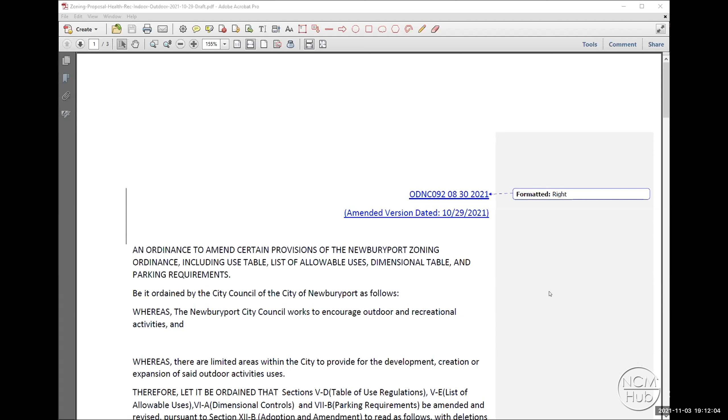When you met in committee last time, there were a couple of changes requested, so we've noted the date of the change here. There were adjustments made to the use table, specifically taking out the SP, or special permitted, category in a couple of districts and making that NP, or not permitted, to make clear it would not be allowed in those districts for the changed use and definition from country clubs to outdoor health and recreation facility. So the outdoor health and recreation facility, the newly termed category, would not be allowed in the R1 or a business district or industrial business districts.

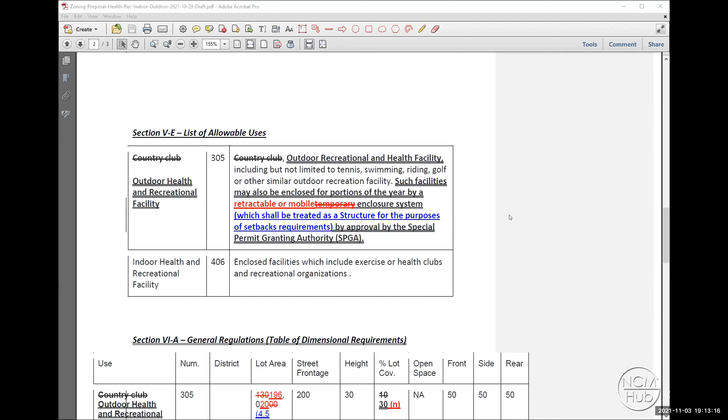The next change is on the definition of outdoor health and recreation facility. There was language in there before about the enclosed portions of the building or partitions that could be retractable. We tried to better clarify that with additional language. We added specific language about the retractable or mobile enclosure system, and we included clarity to make sure there's no dispute whatsoever that the retractable structure itself would still be considered a structure for the purpose of setbacks.

We increased the lot size requirement. That was to address a concern that we not allow this use any more locations than necessary, recognizing the size of the site—one in particular where there was interest discussed at the last meeting—because that site meets a larger size requirement.

There was discussion of raising that number, and what we came to was 4.5 acres as the requirement. Then for the lot coverage, there was a concern noted by the original proponents of this amendment to have some flexibility in light of the enclosed structure being temporary. So there's additional language added in a footnote that the planning board, at its discretion, owing to the use of the temporary enclosure system, may waive that requirement and permit larger lot coverage as part of the special permit. That's similar to the ZBA granting a variance, but it does not require the hardship component—it's just demonstration that it's not detrimental to granting the special permit. There are other provisions like that in the ordinance, and this allows the planning board some latitude to further increase that percentage.

The other concern reflected in the changes is specific parking requirements. Both the facility operators, their attorney, and the zoning administrator weighed in on these parking requirements, and I know Councilor McCauley also weighed in on the particulars. So in essence, these changes were made to address the concerns raised at the last meeting, with the hopes that if they're adequate, this item could move forward. But again, we defer back to the chairs and to Councilor McCauley.

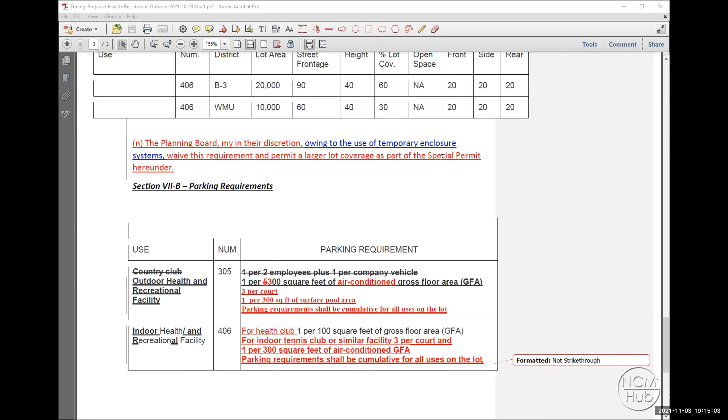Are there any comments from the planning board members on this revision? Does it capture everything that we had talked about as far as you're concerned?

Can I ask a question? When was this discussed before? I'm not sure I was at the meeting. What did we say, October 6th maybe? Yeah, right, October 6th.

Okay, this may have already been discussed, but why would we not allow an outdoor health facility in the industrial park?

There's been a fair amount of discussion of what uses to allow in the business park. There has been some sensitivity. I'll defer to others who may want to weigh in, but there has been some concern from business park operators about having more traffic-generating uses there—more day-to-day in-and-out traffic as opposed to their deliveries and things like that. So that seems to have been a point of concern or conflict. There is obviously a change of uses on Graf Road that have taken place over time that's migrated that area a little bit.

There was some concern from the business park over the years about migrating too many of those types of uses. The outdoor health and recreation facility could have lots of visitors coming and going, pedestrians and so forth, causing concern about the type of traffic coming through their streets and complaints about adjacent businesses that have been in operation for a while. But others may have thoughts on that side of it from our last discussion.

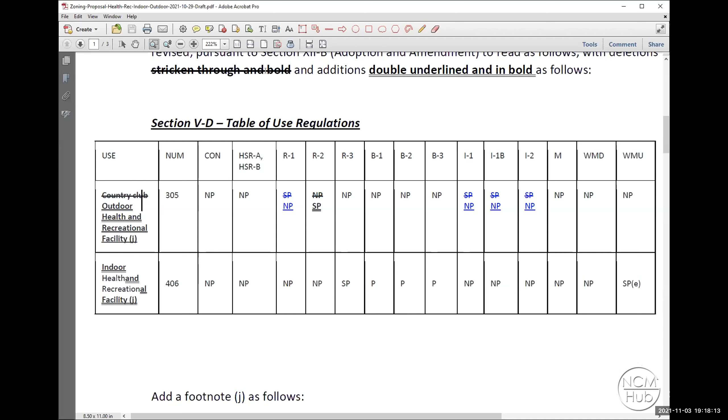I'm not as concerned about R1. I don't have any R1 in Ward 2, but Councilor McCauley does in his ward. I think the concept was they were thinking of golf courses back in the day. The R1 is the palest yellow on the map. I really defer to the ward councilors out there - that's wards 5 and 6 and a little bit of 4 - on whether it's appropriate. But I think what we concluded is that it doesn't fit with the suburban style housing they have.

I was more focused on R2, which is the majority of our residential area, and I can speak to that. But I'm afraid I'm letting you down - I don't remember where we ended up on R1.

Councilor McCauley, could you weigh in on this particular issue? Sure, I have a lot of R1 in my territory. We looked at a different map and parcels - there just weren't any available parcels to be able to do that. So as we talked it through, sure, somebody could buy 5 or 6 or 10 or 24 homes, but that's not really an appropriate use of the land. I'm thinking more of a small tennis club or something on a smaller scale, other than golf courses which I understand are huge. But when we increase the lot size coverage, we remove just about all of the potential in R1, so it was like one of those hanging chads that we just took off.

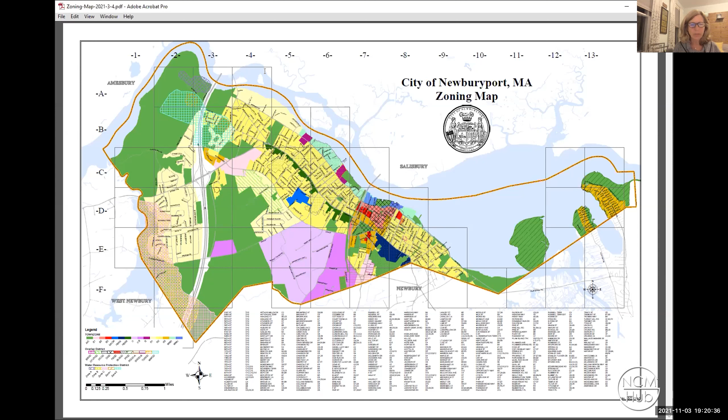And so this doesn't pertain to any kind of public park, like that little park off of Washington Street with pickleball courts - that's a public park. So is this only for private? Correct, yeah, I think we have a different use category for that under institutional, right Andy? Correct, yep.

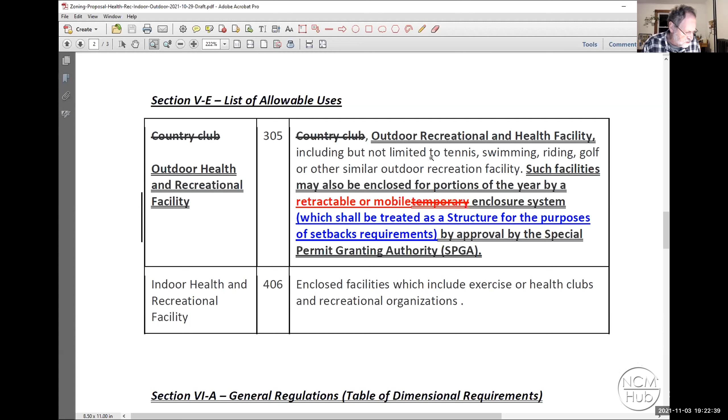I raised this concern at our last discussion about not having an open space requirement. The R2 district has a 20% maximum lot coverage and a 40% minimum open space requirement. So we've given more flexibility by increasing it from 10% to 30% lot coverage. But I'm somewhat concerned about the lack of an open space requirement. An open pool or a tennis court or a patio is part of open space, but once it gets covered by a temporary roof and becomes a building, as we just discussed, it's no longer open space. So it can't be in the yards.

So it would be subject to the front, side and rear yard setbacks of 50 feet. But I guess I would just want to raise this concern again. If we're having a neighborhood, and granted, we're talking about a specific parcel, but for the point of view of zoning, we should be thinking about the general zoning standards. So I guess I wonder why we don't have any open space requirement. And kind of related to that, I'm concerned about that footnote. It seems like it's giving us an awful lot of discretion, which we don't give to other lot coverage, other buildings.

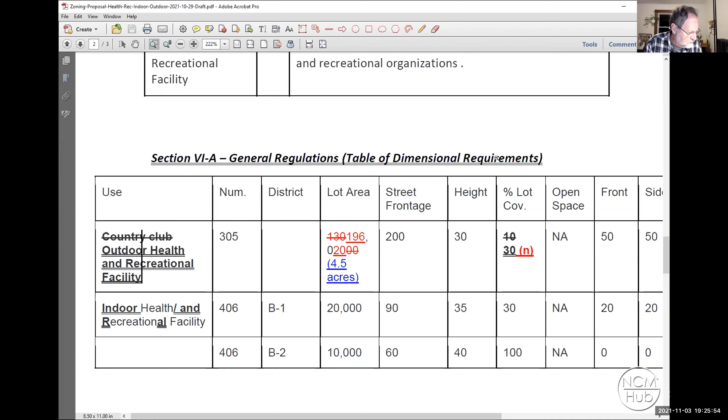Councilor Ackerman? Yeah, first, I think on the previous table, you just changed the word structure to building and you're all set, because a building is a subset of a structure. So because it has a roof, I think you do that and you're all done. It's just change structure to building.

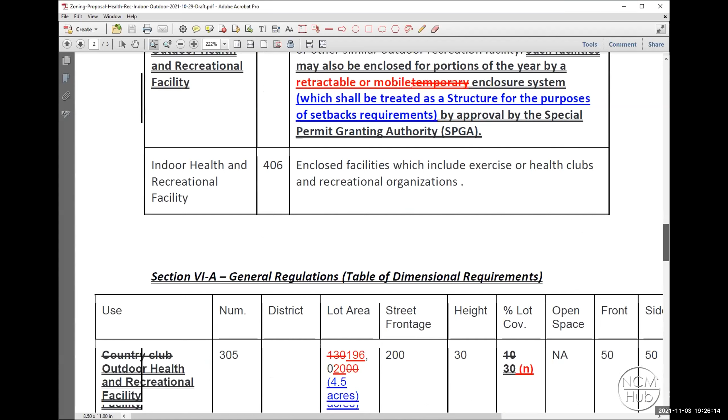On this one, if you look at the definition of open space under our code, it's really - I don't know where they copied it from, but some suburb. So they really had in mind residential zones, and it says open space shall be used for landscape areas and for active and passive recreation, including but not limited to tennis courts. So it's kind of circular here because this is a tennis club.

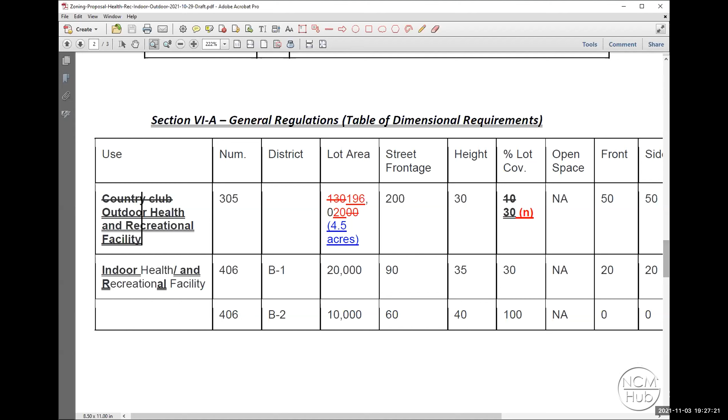And then footnote N, I hear what Rick's saying, which is that it's a little vague, the kind of discretion, because it says waive, and waive is not reduce. Waive is like zero out. I don't think that's what you meant, I think you meant reduce. But anyway, I think if we focus on the lot coverage, we're there. I wouldn't worry about the open space.

To Councillor Eigenman's comment, I think you're correct, and I think what would make sense is exactly what you suggested: for the waive this requirement, it actually should be waive or reduce this requirement. Or if you prefer reduce, just to be clear that is the intent. I think that's actually more consistent with the language we have in the 40R district.

And to clarify, Andy, while you're speaking, where did the 30% lot coverage come from, that number? Was there any analysis, or was it finger in the air? I believe Attorney Mead may be able to speak to this, as she did on behalf of her client at the last hearing. I think that's largely where that number had come from, essentially trying to figure out what would be a maximum that is realistic or feasible in light of what was being discussed there. But again, I think that's probably a question that should be conveyed.

Well, if we discussed it last time and came up with 30, I think we can leave it unless you wanted a further explanation. And Rick has his hand up, so I was going to ask him, do you want that further discussed?

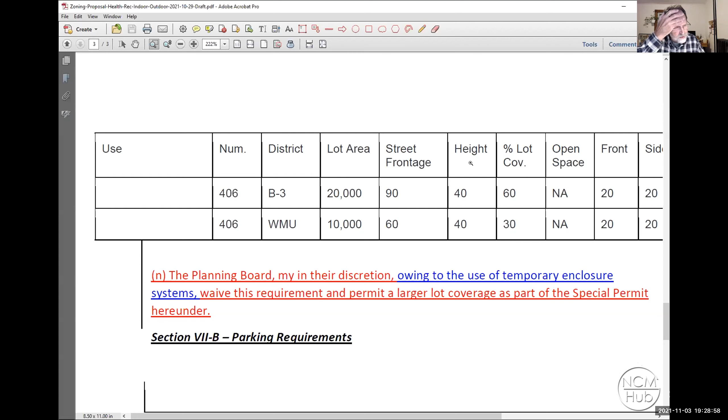Well, I just wanted to point out that Councillor Eigenman had said he didn't know what that penciled out to. 30% of the minimum lot area is 1.35 acres of building coverage. So it's a pretty substantial amount. I'm not sure that there's any scenario in which we would want more coverage than that. And therefore, why would we want that footnote, given the fact that we need to have 50 feet of open space all around the perimeter plus parking for the site? So I'm not sure that you can get more than 1.35 acres of building onto that minimum lot area.

I see Attorney Mead's hand is up. Andy?

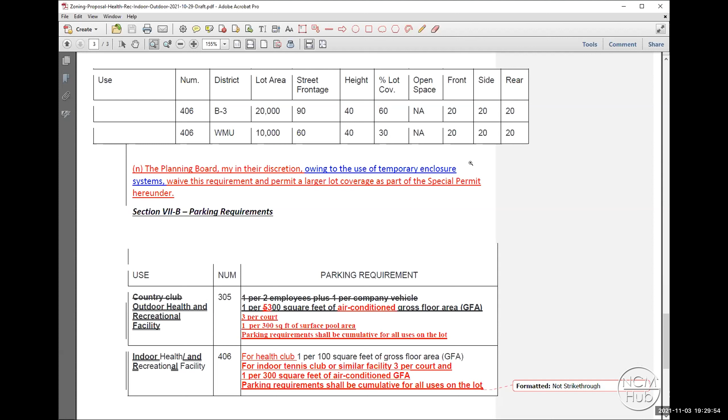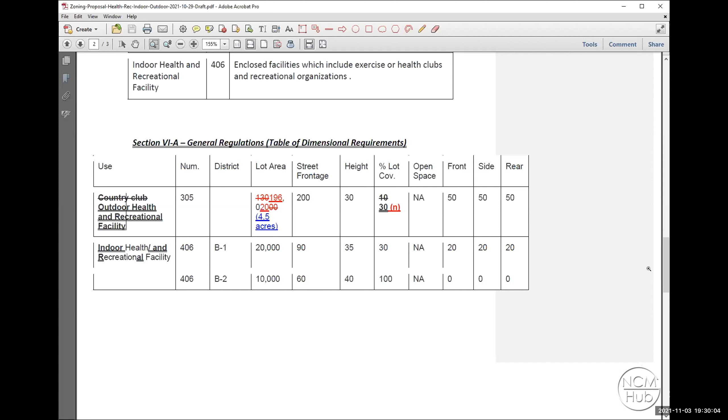Thank you, Madam Chairs, plural. May I just offer a few pieces of information related to the lot coverage so that you know it wasn't a finger in the air? Thank you. So if I could, Andy, if you could switch over to our presentation, because we did the numbers so you could actually see, because I knew this was going to be a question that Mr. Tainer had at the last meeting. So Andy, if you could, go to that slide.

So what happens is my clients, who haven't done a full analysis of the lot, said okay, about what size of pool are we going to have? And then you have to think about potentially what the additional coverage would be around that pool if you put a structure on it, because the structure wouldn't be immediately on top of the pool. And then you have locker rooms and perhaps some amenity building that might have a snack bar in it, or even an open roof - a roof with open area, which now, under the new definition, is a building and considered against lot coverage even if it has no sides.

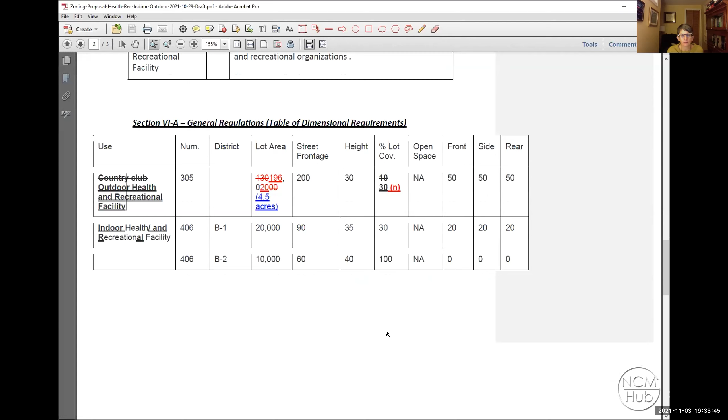Any reason not to move on, anybody? Alden does have his hand up. Sorry, Alden, are you still on the 30% lot coverage?

Well, I was on the 6A table in general. I was just wondering if on Use 305, where the district is blank, should that really say R2 there, as that's the only one allowed with special permit in the revised version? Should we specify that in the district column?

This is Andy. Jennifer can speak to that as well, but there isn't a need here because functionally that still operates the same way, but certainly we could do that here. If it changes again, there might be an issue. Usually when there's one requirement for dimensions regardless of district, we do not list any district there, but as you pointed out, we could just put that in this box now.

Okay, and then similarly for the 406, should there be a row for the R3 district, since that's allowed by special permit and that's not listed in the existing table? Yeah, I see what you're saying. Thank you.

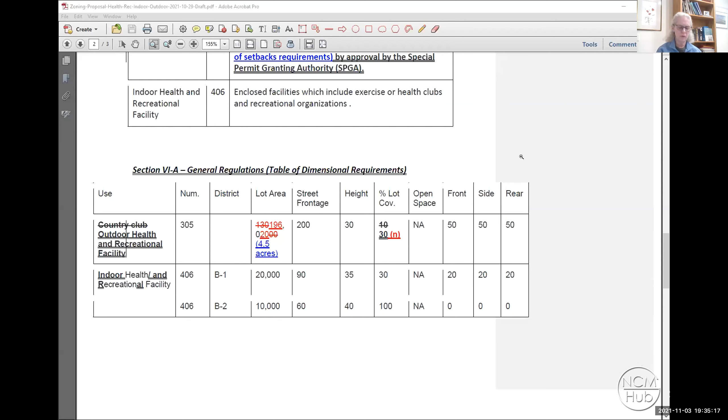Okay, thank you. Moving on, Rick, with your next comment please. This has to do with the parking requirements, and it's just trying to understand what these mean. I'm not sure what the restriction about air-conditioned gross floor area is, as opposed to just gross floor area. If it were heated but not air-conditioned, would this not apply? I guess that's the first question.

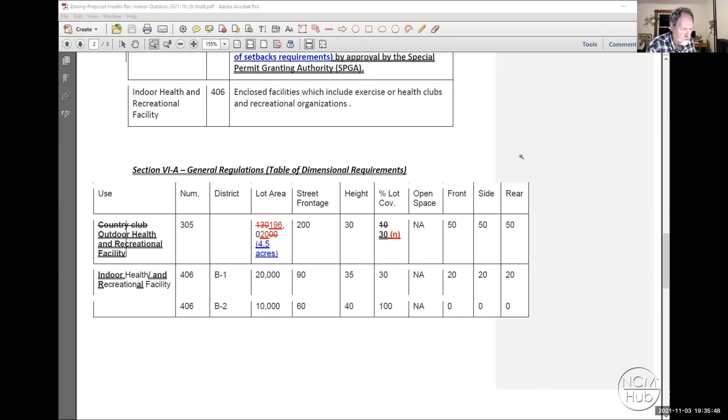This is under the parking requirement for both the outdoor and the indoor pieces. So I don't see what the word air conditioned adds, since gross floor area is the area within the building. The second thing is 3 per court, and I assume this means tennis and pickleball, but it could mean basketball too, since court by itself is not defined. And then I didn't know what surface pool area meant, as opposed to pool area. There seem to be extra words in here, and that raises questions for me.

Jennifer has her hand up. I wanted to speak to two of the points. Specifically, air conditioned speaks generally to heating, cooling, and ventilating, as opposed to those specific terms. I believe the reason to differentiate here is we have lot coverage, which would include, as Attorney Mead pointed out earlier, area of the site covered by a roof and columns but not necessarily within a building. So it's not air conditioning in the layman's terms, but in industry terminology. And I believe surface pool area was meant to differentiate it from the pool deck, though Attorney Mead can correct me if I'm wrong.

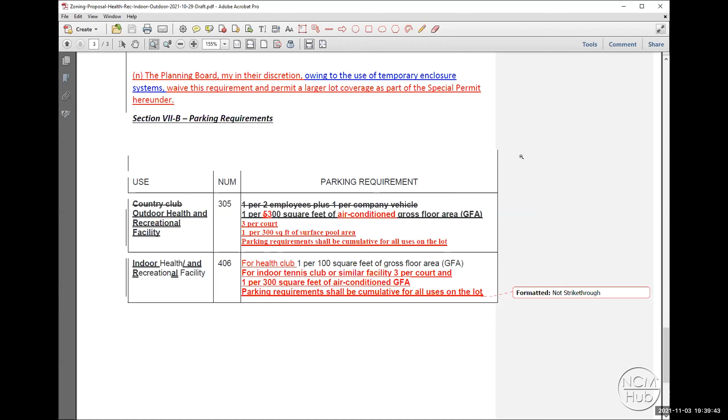Just to give you an idea of the impact, Andy, if you don't mind going back to my presentation for a second. So currently, the club has 82 parking spaces, and that appears to be based upon gross floor area of the entire club.

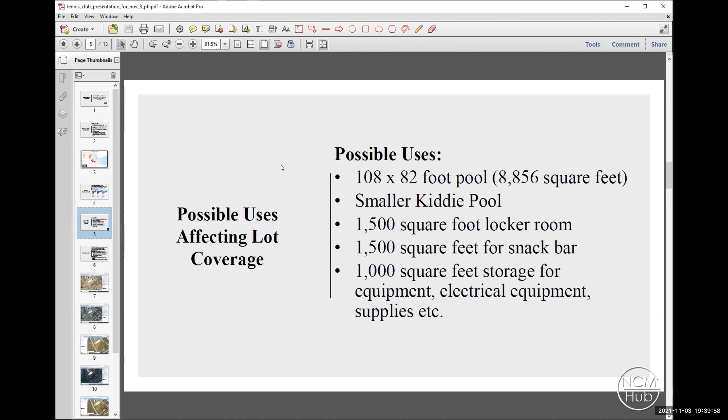If you go to slide 7, Andy. I want to go through these images so you can see how much of this parking is actually used. This is 2001. Next, 2005. Next, 2014. Next, 2015. Next, 2017. Next, 2019. And just so we can all cry, I'll show you 2020—nobody was at the club in 2020.

My point is that they don't use the parking lot to the extent you would in a typical other building. So the standards I found across the country—from the United Land Development Code, the IBC standard, other zoning ordinances in Massachusetts and elsewhere—base it on courts.

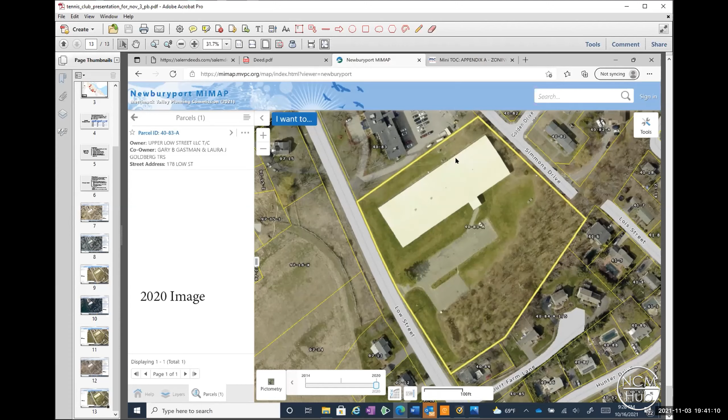Because if you think about it, take the tennis court for example: at most they have 6 people per court if running a clinic, plus the professional, so that's 7 people on a court. They have 6 courts—that's 42 people. Most of those people come together in a car, or a family comes in one car. Similarly, for a pool, people typically aren't driving individually—families come to pools together. So the standards aren't essentially by each person, but by the size of the pool, because the size of the pool limits the number of people who can actually attend. That's where those numbers came from.

Thank you. Thank you.

I think the one thing Rick was also talking about was the definition of the court. It's pretty clear it's a tennis court, right? Yeah, I mean, you can say tennis or pickleball—that's fine, because they may have some pickleball courts, but that's the point. I don't think we're talking about basketball courts, but we can say that. I'm happy to clarify that any way the board or committee would like. That would take care of it, but just those two uses.

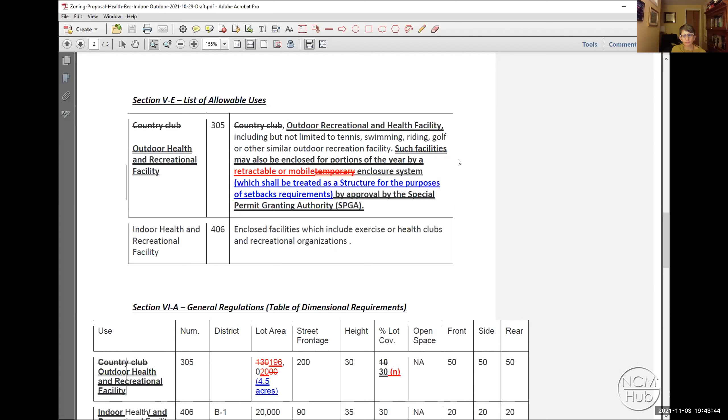Councilor Eigerman: Yeah, I'm grateful the applicant's done some research, though I wish we had seen some of the other examples. There are two ways you can go here. You can go into detail accounting for the reality of how many people use a court for a certain sport, because the number of people using a court for basketball is going to be more than for tennis inherently. So if you're going to go that way, you better plan for basketball because it's more people.

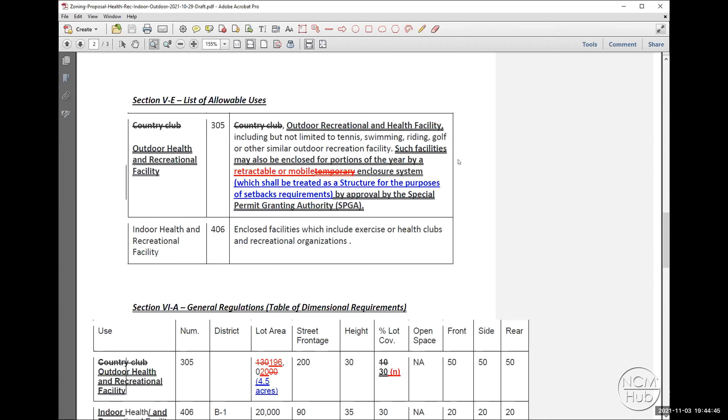I would suggest we not throw out the idea of just doing a basic square footage. I know there are fitness centers and recreational zoning, and I'm sure there are a million different ways people have skinned the cat, where they just use a big number and say this many spaces per gross square foot, then average it. It's also easier for Jennifer to enforce and apply rather than getting detailed drawings about how much is pool deck versus water, what's heated versus air conditioned. For simplicity's sake, if we could agree on just a gross number, I think it might be easier. It's up to you guys what you want to do.

You have to write this to deal with the possibility that sports are going to change over time. So I don't think an indoor tennis club or similar facility is descriptive enough. If you have basketball tournaments, that's a lot more people than tennis. That's all I'm saying.

Attorney Mead: I think Councilor Eigerman raises some good points. The uses and parking requirements are different for, say, a Gold's Gym, right? That's a different use category. As an outdoor recreational facility, the numbers are more reduced across the board of the ones I reviewed, because of the various types of activities outdoors, they really focus on the actual activity itself—tennis courts, swimming pools, things like that.

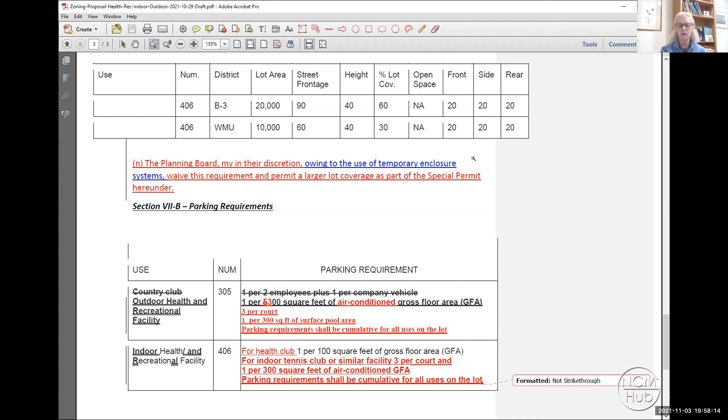We haven't had public comment on this, Councilor Shand. We probably should call for that for the record. Yep, agreed. So for anybody who is looking to make a public comment, please raise your electronic hand and we'll call on you. I see no hands. Nothing, chairs. All right, let's bring it back in then, we can close public comment.

All right, are we ready to make a recommendation to approve the revised amendment as amended tonight? Is there any further discussion by anybody? Can we hear what the changes are that are in the revised amendment?

Let me see if I can do this, and anybody stop me when I'm running on. I believe we agreed to everything in the table of use regulations, the revisions there. So moving on to section 5E, replace the word structure with building. In section 6A, I believe there was an agreement to add the 2 districts, R1 and R3 for use 305. Is that correct, Andy?

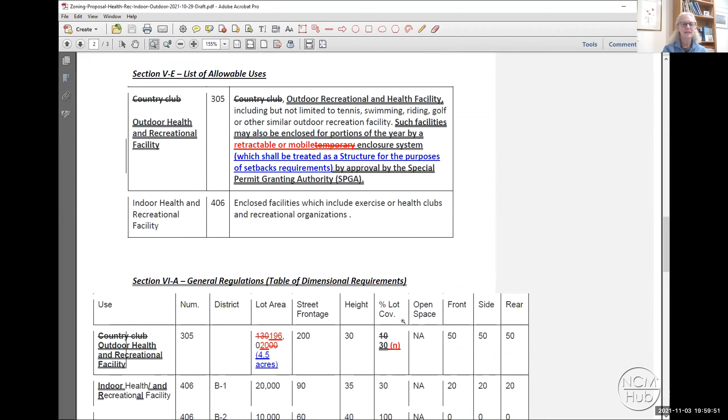That's correct. Andy, can you pull it back up? Yep, hang on, I'm just going back. So, down, we're going to 5E, 6A, next page.

That discussion, we wanted to add the 2 districts into use 305. But there's only one district, isn't it? Just the R2. Right, 406, it's R2, where you have, it's possible by special permit in R3. That's the indoor. R3 special permit for 406. Yes, pretty sure.

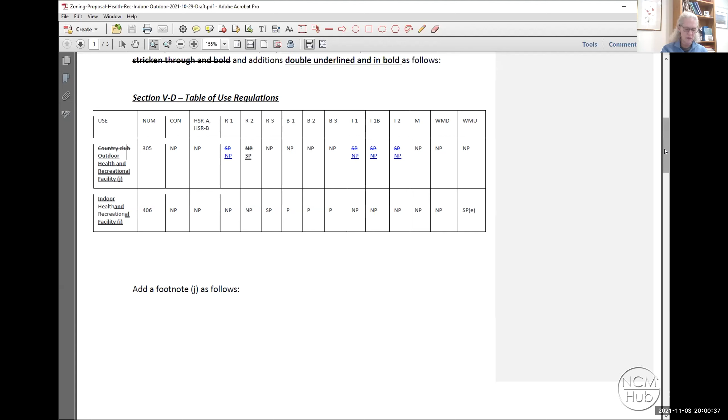Okay, I was a little confused on where we came out on that. Clarifying lot area for 305 is 4.5 acres. I'm still on that table, Andy. And I believe under lot coverage, oh, it's okay at 30%. We just had a long discussion about how that came to be.

Is that correct? I guess yes, 30% seems fine. I guess I was just still concerned about the footnote. Oh yeah, let's go to the footnote, that's on the next page.

Yeah, if I could, my recollection was there was discussion of changing at least 'waive' to 'waive or reduce.' But again, maybe Rick was getting at whether or not he, as a planning board member, has a level of comfort with the discretion he'd have at that point. Yeah, well there's 2 parts to that. One is, I'm really not comfortable with that because it seems we should be able to get the number right since we know exactly which parcel we're talking about.

And then if we were to keep the footnote, I would actually just simplify it. I'm not in support of this, but I would just say the planning board may permit a larger lot coverage as part of the special permit hereunder. Get rid of all that other verbiage.

I think it's a question of whether we are comfortable with the number we come up with, or whether we want to change it in a special permit. So my preference would be to say we've got the right number and not give us any special discretion for this. But if we had discretion, I would just say the planning board may permit a larger lot coverage as part of the special permit.

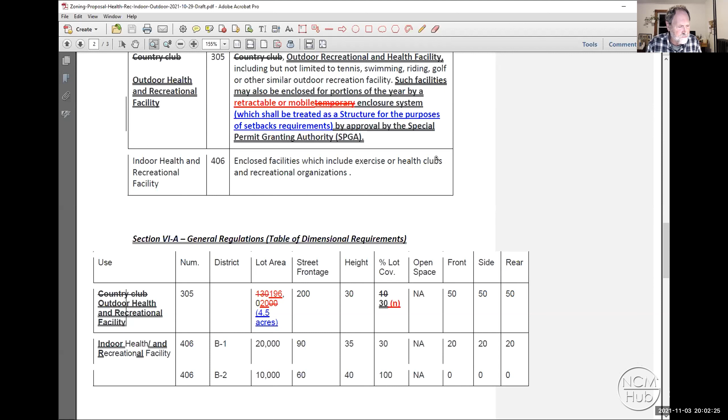Andy, would you scroll down to the note? Sorry, you're not seeing that there? As, now we see it. There was a delay. Oh, sorry. Yep.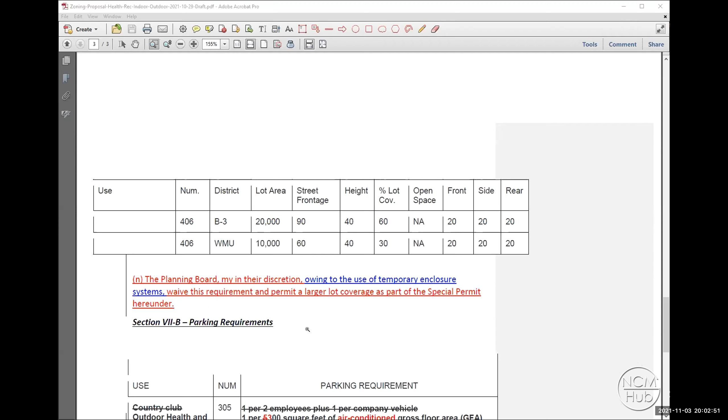Well, I tend to agree with Rick. Let's make sure we have the number right. So 30 is enough, because I thought Attorney Mead was saying they know it's definitely 25, so they put in a little bit of fudge in there. So we think 30 is good. If we had to make it 35, I could be persuaded if that's a necessity. Otherwise, I agree with Rick. Let's just set a number.

Okay, let's leave it at 30 then, since that's where we were when we talked with the applicant about their example, and take out the note. Agreed. By the time we get to the city council floor, if the tennis club goes back and says, oh my God, it's 32, we'll entertain that on the floor. Great. Okay, but our recommendation will be to leave it at 30 and remove the note.

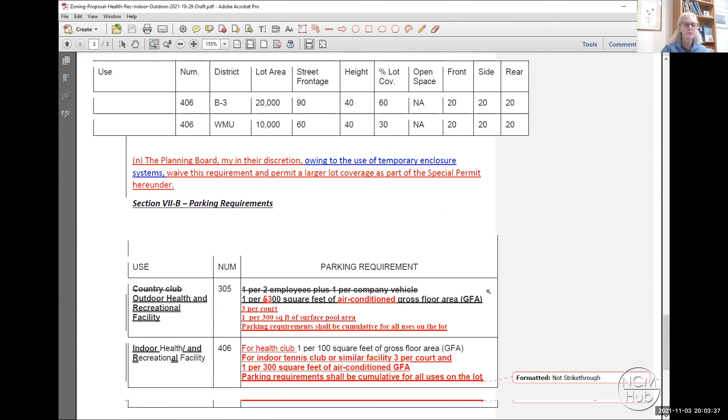Under parking requirements, Andy, please move down to 7B. I have a change of 3 parking spaces per court, applicable to indoor or outdoor courts. And I have a change that says 1 per 300 square feet of surface of the pool area itself. You can make that sound more legalese, but that's what we mean, the actual pool area. And those are the only 2 changes after all of that, unless I've missed something in that section.

All right, those are the amendments for tonight. So I'll take a motion to recommend to the city council that you adopt this amended version dated 10/29/2021 with amendments made at tonight's meeting. Could I have a motion?

Someone make that motion, please. I will make the motion, Rick. Thank you. Second. I can second it, MJ. Thank you. I'm going to call roll for approving the recommendation.

Alden, Yes. Beth? Beth, are you there? No. Now, can you speak? Because you're unmuted from this end. I do know that Beth has been having some technical issues. I don't know if her audio is working. We'll leave her as an abstention then.

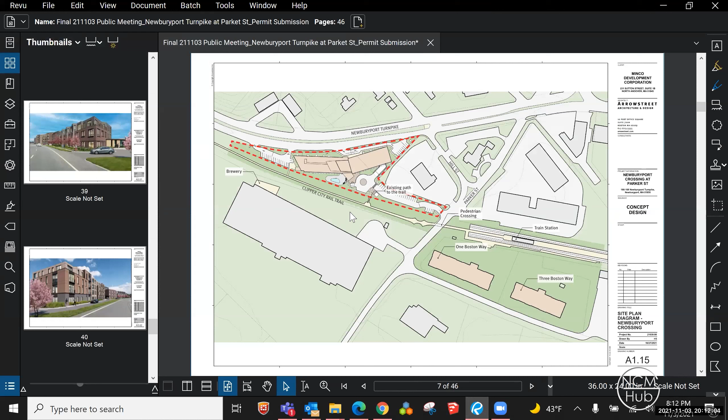Joe, are you able to do that? Joe, are you able to pull up your slides? He's muted at the moment. I'm trying to do that right now, let me try to. Yes, oh, you see that? We see your laptop anyway, or your, okay, we're looking at somebody's email. Okay, how about that? Perfect, go for it.

Can you start by introducing yourself, so we'll know who we're listening to. Yes, thank you Andy and Ms. Sontag. My name is Joe Sirkovich, I'm one of the architects from Arrowstreet, part of the team working on this development.

Tonight I'll be presenting the submission that we submitted on the 27th of last month. Joining me will be Scott Cameron from Warren Cameron, as well as Bob Ulig from Halvorson, and Lou Minicucci, I think, will also be kicking in some comments as we go along.

I just wanted to briefly remind folks where we are on the timeline here. We had an informal pre-application submission meeting at City Hall on September 17th. We got a lot of good feedback and suggestions for our submission at that time, which we've tried to incorporate in the plan you see in front of us. After that meeting, we also had several meetings with the Planning Department, the Parks Department, Sewer and Water, the Fire Department, and so on, to incorporate more information into our plan.

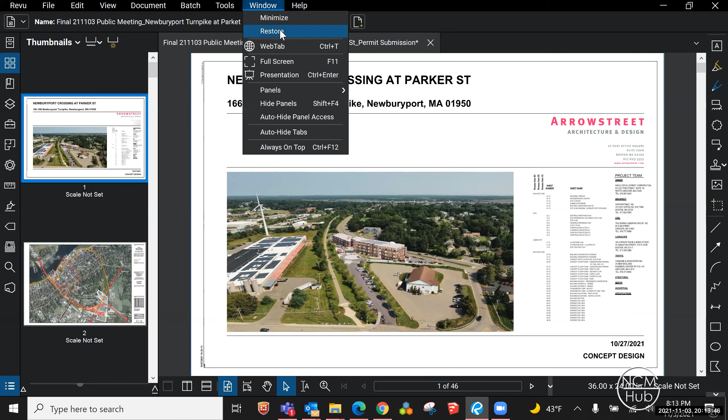On October 6th we submitted the preliminary draft application submission. October 13th was our technical review meeting with the committee. And the plans you see in front of us now were submitted on October 27th, and this is the actual plan application submission. We have about 40 slides to go through, so I'll go through these quickly. Let me see if I can get to full screen here.

So as you know, the site is 166, 168 Newburyport Turnpike. It's this site here.

Just to give a little background, I always like to do a regional context diagram to show where we are in the overall scheme of things. Our site is located here.

We're kind of at the crux of several corridors: the Route 1 corridor, the Clipper City Rail Trail, which passes right up alongside our site, and the train terminal from the MBTA is right over here. So there's a number of interesting intersections at our site that are significant and will play an important role in how we inform our decision-making for the development of this design.

We're also kind of at the crux of this retail area, the smart growth district, this industrial zone over here, and then the residential area over here. So there's a lot going on all around us, and we're going to be trying to resolve a lot of different things here.

We also think that since this site is so visible on Route 1, both as you're coming and going, it's kind of a landmark or an anchor to both the smart growth district as well as the Newburyport Crossing community, which is this area in red down here. As you're coming down Route 1 going south, it's kind of an introduction to the smart growth district as well as this neighborhood. And as you're going towards Newburyport, it kind of points the way into the downtown area and is kind of a marker or gateway building for what's about to happen as you enter the historic district.

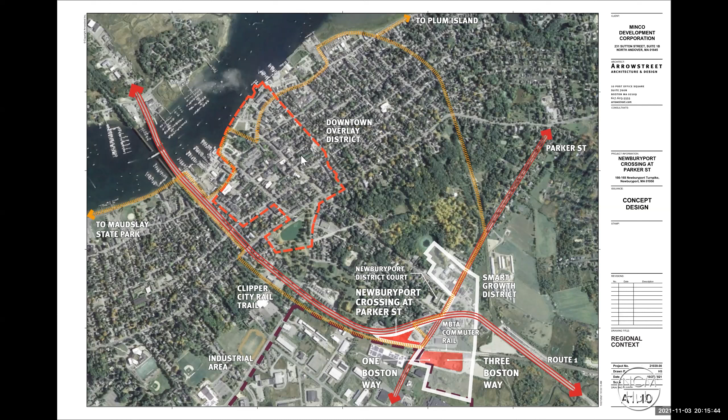Zooming in a little bit closer, just to show you that 1 Boston Way is down here, which is built and open. 3 Boston Way is under construction. The train terminal is right here. And we kind of see all 3 of these buildings, our new site and these 2 buildings, as kind of a neighborhood.

We know that 3 Boston Way, as Lou pointed out to us before, will be both LEED certified, Fitwel certified, as well as Passive House certified with all electric appliances. So they're very committed to sustainability, a long-term commitment to sustainability. I think we're going to have the same kind of commitment on our site here as well.

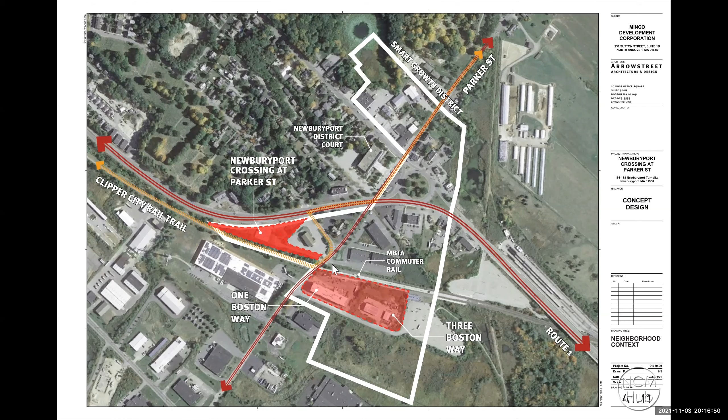Let's see. This is the existing conditions of the site. There's 2 lots that total about 2.47 acres. There are 2 buildings, 2 one-story buildings, one here and one here.

As I said, the site is bounded by Route 1 with 4 existing curb cuts that we plan to reuse, the Clipper City Rail Trail here with a connection through our site, which we plan to enhance as well, and then access along Parker Street, which we plan to use as our major entrance. And then this industrial building to the south.

Just a quick overview of the zoning and the program. The Smart Growth 40R district in this area, sub-district A, has limitations of 45 feet maximum in height. We're building up to 35 feet for part of our building and up to 45 feet for the rest. Number of stories is 4 max. We're building at 3 and 4 stories, so we're voluntarily reducing the height of the building.

We have 78 covered parking spaces, in the lower level of the building, and 53 uncovered, for a total of 131 spaces. 108 are the minimum allowable on this site. We're allowed to build up to 99 units on this site, and we're actually providing a few less than that, 94 total dwelling units.

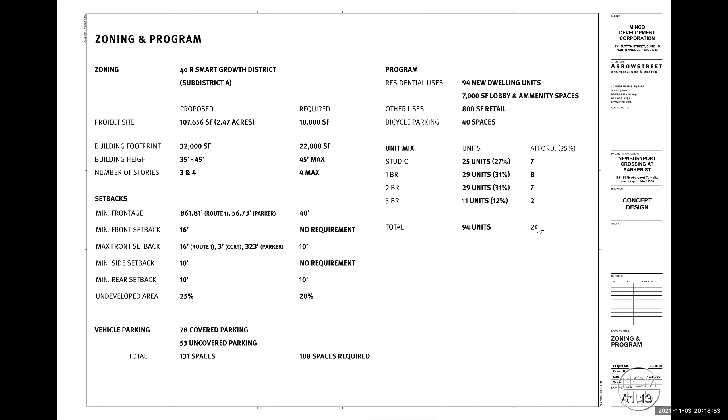When we first started this design process, we looked at a number of different buildings: a single building at 4 stories, 2 buildings at 4 stories separated by a gap in between, and L-shaped buildings. We feel that the current layout offers the most benefits to both residents and the town, as well as urbanistically.

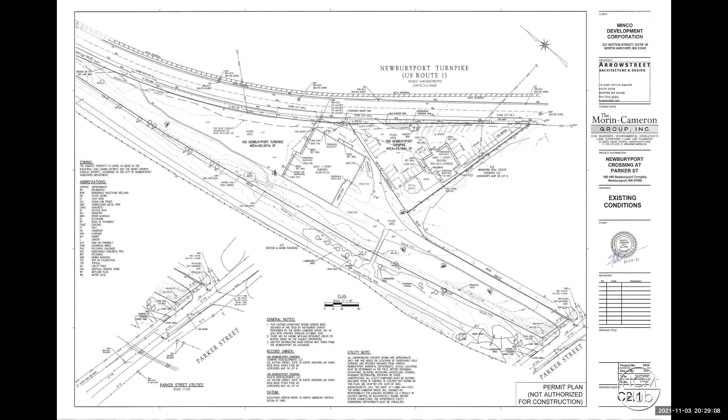This is a demolition and site preparation plan. This will be a key plan that will get further developed at the construction phase, working with contractors, the town, under the stormwater permit and EPA stormwater permit provisions that apply in construction.

Notably, I wanted to identify in this plan, we did outline the limit of work for the property, which is going to more or less follow the lot line, except for the portions where, again, we're starting to blend the development site together with the rail trail parcel. You will see a little bit of overlap, which I'll go into in the subsequent plans.

As far as erosion controls, this property would be subject to the EPA Stormwater Pollution Prevention Plan provisions under their construction general permit, so the site would be registered. There's a fairly extensive monitoring obligation under that with all your erosion controls, silt fences, mulch socks, construction entrances, dewatering measures and whatnot that are fairly commonplace today, and most everybody is used to implementing these plans.

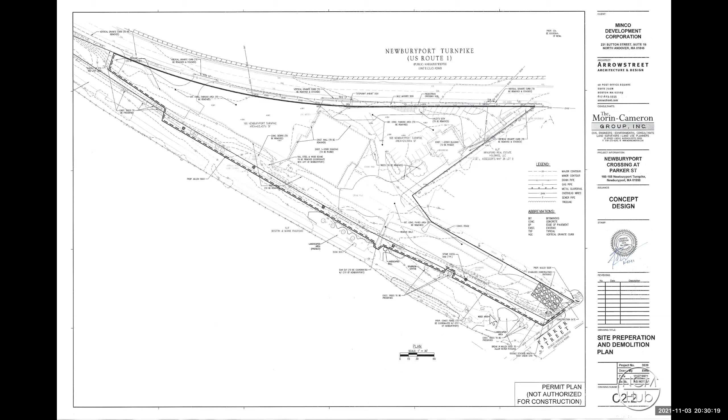Moving forward into the site plan, I'll start going through some of the site design constraints. We're balancing here a lot of different factors horizontally, and these really play into the lot shape. Joe and his team, working with Minco, did an excellent job crafting and shaping the building to fit the property in the shape.

And in the design of the site that's going to support this, our primary objective obviously is access to the property. That main access point, where we expect to have the property address, is on Parker Street, and that would be a 24-foot wide conventional driveway opening, two lanes.

Along it, we did put some bends to break it up so it doesn't look like a long straight kind of runway feel. That gave Bob and his team an opportunity to landscape that and treat it. So from the street line, you'll see a lot of parking fenestration, I guess, as you look down that aisle.

There are 4 parking spaces at the street, 1 handicapped, and a proposed sidewalk connection, handicap accessible, back to the rail trail. Then moving further down, you have additional parking for tenants.

When you reach the building, the primary frontage has a turnaround designed in a teardrop shape. You'll see a walkway marked out crisscrossing, and a solid waste disposal area there, shown with fenestrations, all flush construction.

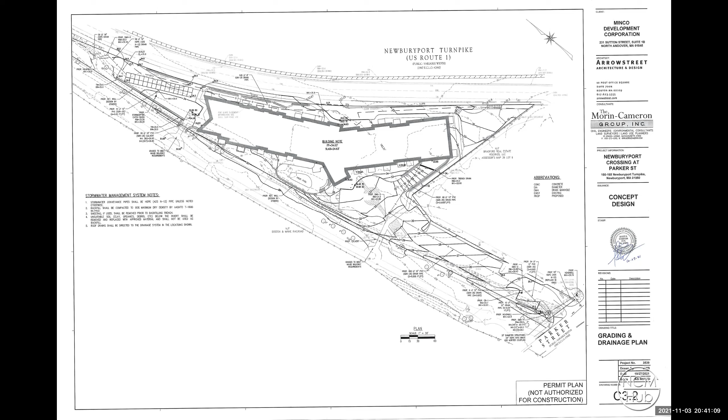The next plan, I'll be brief, but the key thing is the utility connections. We intend to bring all the utilities, water, sewer, stormwater, back out to Parker Street. Working with the fire department, we did include the provision for 3 hydrants on site. We'd run a main up the Parker Street driveway, along the south end of the building, then along Route 1 to provide a hydrant at the northerly parking area, in front of the main entrance on the Route 1 side, and in front of the entrance on the Parker Street side. There's another existing hydrant on Parker Street, almost across from the site, at the Newburyport Business Park driveway. So these hydrants are all within 500 feet, which is the subdivision spacing requirement for hydrant and hookup points for trucks on all sides of the building.

And then I talked a little bit about the drainage - the hole in the ground where everything kind of floods now into that culvert. What we're proposing is to continue the upgrade work that was started on Route 1 and continue it here. Presently, under the existing driveway, there's an old corrugated metal pipe. It has reached the end of its useful life cycle - they only last about 40 years. It's rusted and will probably fail completely within the next 5 to 10 years based on its age, so that pipe will be replaced.

That pipe collects runoff from the adjacent industrial property and portions of Hill Street, Parker Street, and Route 1. We would install a new oversized manhole where there's currently just a big hole in the ground. That manhole would receive this pipe, as well as the runoff from the development through a new closed drainage system, and the runoff from the rail trail drainage swale, collecting it in an area we can maintain without worrying about blockage from obstructions, debris, trash, or leaves. It gets this water underground so it's maintainable in the future. That upgrade at the intersection for the closed drainage will benefit both the property itself, to comply with stormwater, but also the rail trail and public and private properties around the area.

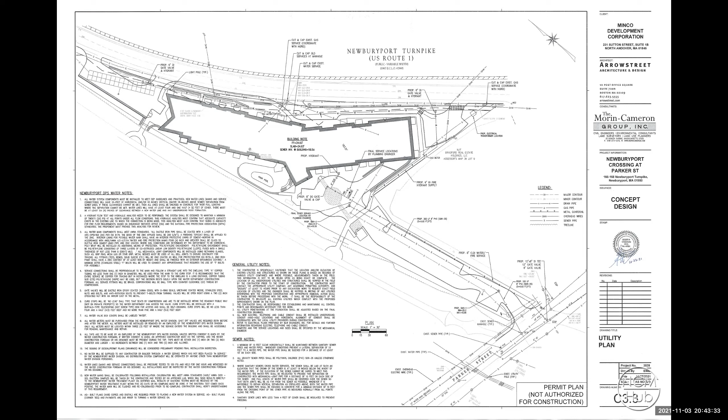I think that'll conclude my presentation on the civil perspective. I am in receipt of Phil Christensen's first review of the project - we just got that the other day, so we intend to go through it in detail. I've also had brief preliminary conversations with John Eric White from the Newburyport Engineering Department. John Eric came out to visit us when we did our soil testing. So from a technical standpoint, we do expect to go through the typical process with third-party review and address Mr. Christensen's and Mr. White's comments. Thank you.

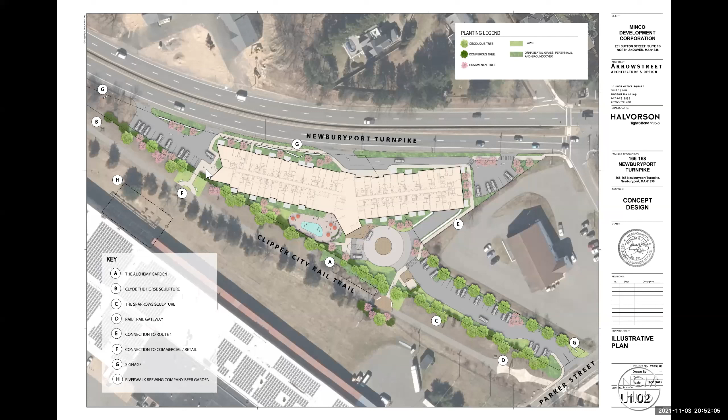And then if you want to just go to the lighting plan for a moment. So we've developed a lighting plan.

I think the thing you'll be most familiar with is we're using the same fixtures as a thread tying all the Boston Crossing projects together. We're using the same parking and pedestrian scale fixtures on this site as were on the previous sites. Both are cut off, both use warm LEDs.

So it's a comfortable feeling light, not cold and off-putting. And all the lights are cut off so that we keep the light down and on the site versus spreading light pollution elsewhere. I think that generally covers the highlights, Joe.

Okay, thanks, Bob. This is Joe Sirkovich again, and I'll just go through a few slides about how we organized our building. As I mentioned, we have a 4-story building on the south and a 3-story building on the north, 42 units here, 52 units on this side, and then both of these buildings are linked by kind of an amenity space.

A vertical amenity space that includes the lobby, access to the grade level pool, a second floor outdoor deck, a co-working space, a lounge, and then an upper story 4th floor amenity space that also includes an outdoor deck. So we really tried to take advantage and maximize the space available in this gap between the two buildings by creating spaces that can help reinforce the community between these two buildings.

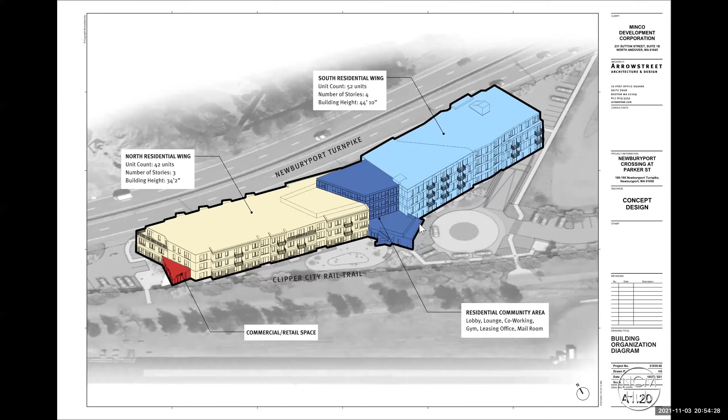A view from the Newburyport Turnpike side. The small retail component is highlighted in red here.

This also shows how we're trying to reinforce that curve of the turnpike, and to set back some of these buildings so that they read more like separate buildings, setting them back several feet here. And then by doing this, you also get that wide open expanse that faces the Clipper City Rail Trail. It's much more open on the back side, kind of a different feeling on the back than on this side.

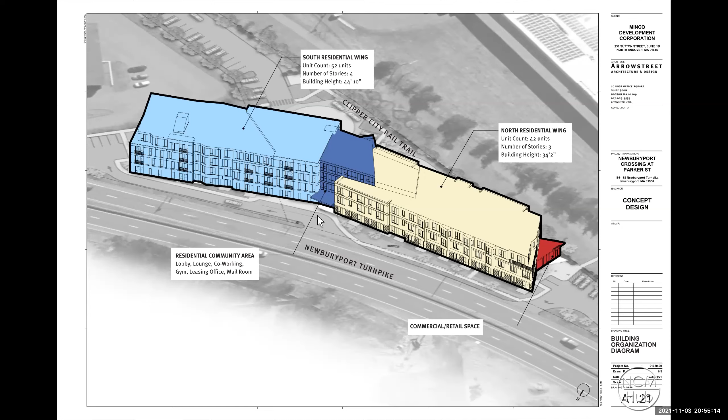Some highlights of the ground floor plan when integrated with the landscape: as Bob and Scott mentioned, access to the Clipper City Rail Trail is an important component because it's such a link to the neighborhood and to the rest of Newburyport.

And even spaces beyond like Maudslay State Park and Plum Island, and the trails to the south. So we really see this as a real focus for our project, the neighborhood, and contextually as well. The main entrance, the pool, there's a gym that faces the pool. At the main lobby we have a package delivery, a mail room, an open stair with a small atrium that goes to the second floor, leasing offices, and a secondary smaller lobby on this side for drop-offs and pickups.

The retail component is down on this edge, and the north parking lot, south parking lot, short-term drop-off, and a 12-foot wide access drive. The access to the below-grade parking is down here.

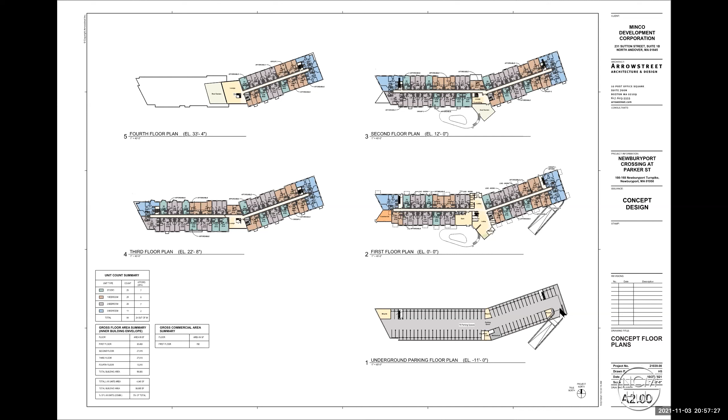Bike parking down in the basement, and the ramp that takes you down to the parking level. That's the parking level, about 11 feet below grade. Bicycle storage in 3 locations. The main lobby, dog wash area. Each parking space also has a storage locker at the end, similar to what was designed at 1 Boston Way.

On the ground floor, the main lobby again. The live-work units are these 2-bedroom units here. There are 4 of them, one with direct access out to the sidewalk, another one here, and 2 more here. Typically our 3-bedroom units are on the corners.

And you'll see an even distribution of affordable units across all floors. The structure on this ground floor will be designed so that if in the future a retail or commercial component would like to come in and take a few spaces, we'll be able to open those spaces up wider than the normal unit to accommodate just about any size of retail component.

The second floor also shows how both buildings start to step back to reinforce a 4-story building here and a 3-story building here, with a gap in between them. As you view this building from the Newburyport Turnpike, you'll see that recess and hopefully read it as 2 separate buildings. They're also treated differently in terms of the architecture on the exterior, which we'll get into in a minute.

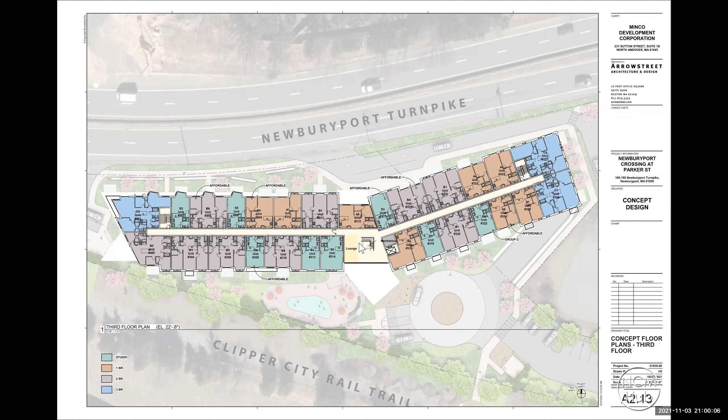And then the 4th floor with the lounge, open stair, and an outdoor deck. On the roof, we are making accommodations for solar power as Lou did on the other 2 projects. The location and placement will depend on the mechanical systems and vents that will be distributed up here, so we're planning on some area about this size, whether along the edges or over here, depending on where the condenser units and vents are eventually laid out.

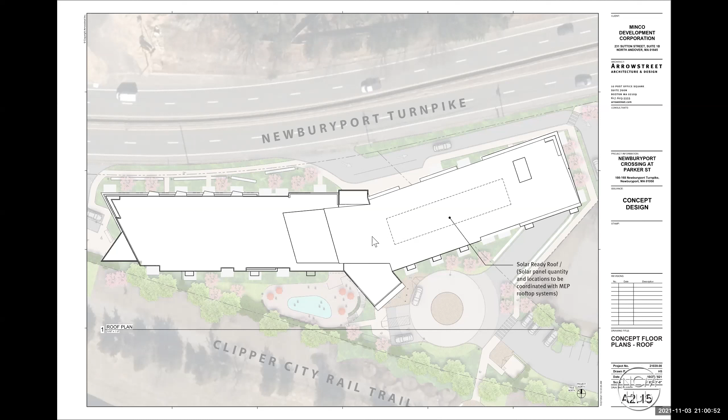In terms of the building massing and how we tried to organize the building, we had a lot of different inspirational images that we liked: buildings that have setbacks as you get higher, that use different materials like brick, and this one has metal, but we're not really using a whole lot of metal. Bay windows that project out, and ground floors treated a bit differently than what's happening above to reinforce that commercial zone.

Different types of windows, some that jog back and forth to create variety, texture, and depth. We like what's going on here—different colors and textures. We really like the wood tones we saw in some of these buildings. Balconies, and again, setbacks.

In terms of materials, we're looking at brick in some areas with things like soldier coursing, modern detailing with crisp edges, Juliet balconies, coursing articulation, different types or colors of brick on one building versus the other.

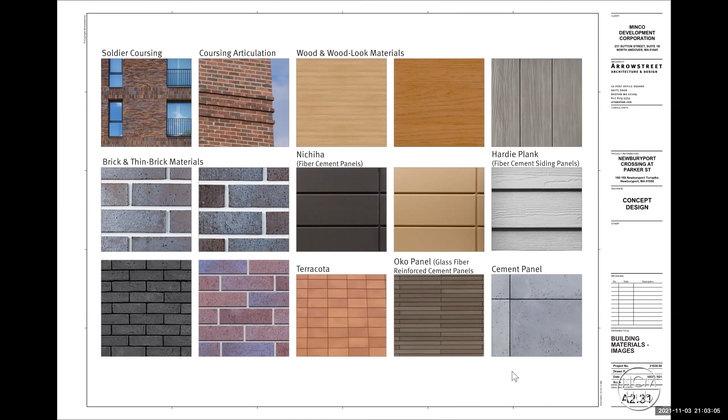We did put together a box of samples and sent it to the planning department last week. These are the samples that were sent out. Some of these we're not planning on using—we like the warmer tones better.

The brick with the iron spot, we like real wood that's treated with steam and compression so it's impervious to insects. We're also thinking about using some of those, but just a combination of brick, wood, and wood tone fiber cement products is kind of what we're planning for the two buildings.

This is a 3D view looking towards the Clipper City Rail Trail, showing how some of those materials we plan to use on both the 3-story building, which we see as some brick and some wood siding-like material.

The retail area could be Nichiha panels and glass storefront to make it stand out, contrasting against the residential building. You see the pool here with the connection to the upper level deck.

We want the main entrance to be very open and welcoming with a lot of light coming out. So we're looking at open storefront, a lot of glass here as well as in the amenity area, to try to separate these two buildings, providing a lot of fenestration and views out toward the rail trail and back towards 1 and 3 Boston Way.

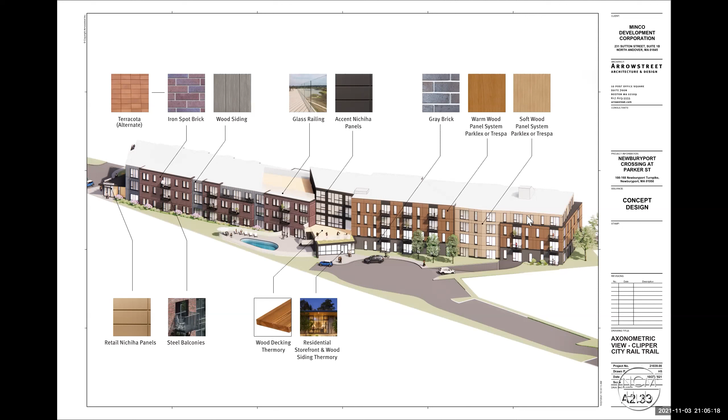We're doing that on both the front and the back of the building. This is the Route 1 side—you can see the bay windows we've tried to incorporate, the retail area, the amenity link in the center, and then breaking up that roof line on both of the buildings.

And then reinforcing that whole curve as you go along Route 1. The elevations: 3-story building with the brick and the wood look material.

The main entrance is over here, the amenity link, and then the 4-story building, with balconies on the rail trail side and Juliet balconies on the turnpike side. We tried to use different colors and textures to really make these two buildings play off of each other and work well together.

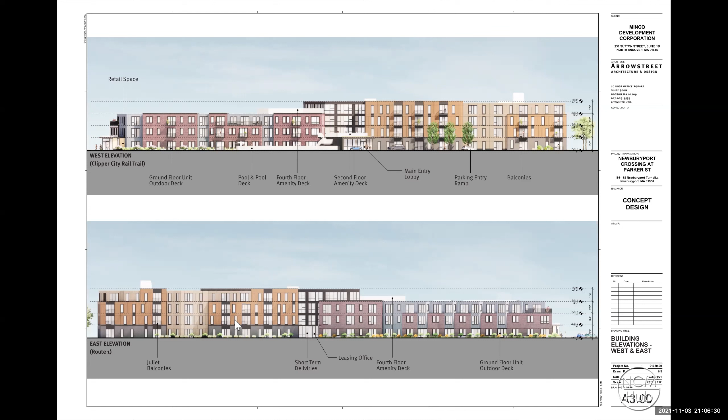And then we have a few renderings just to highlight some of the things I just spoke about. This is an overall view that shows the connection—again the bend in the building, opening up toward the rail trail, looking back down, trying to make that connection with the rest of the neighborhood.

The big turnaround, the pedestrian connection through Hill Street, which will cross here and come across like this—that's the existing connection to the rail trail, and then the other one is down a little bit further. Opportunities for solar panels on the roof being shown.

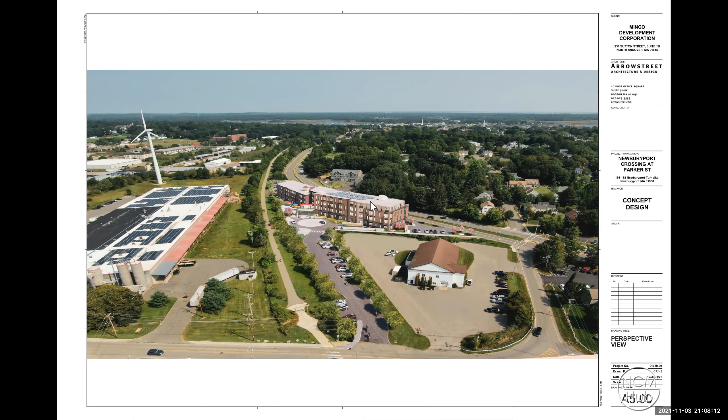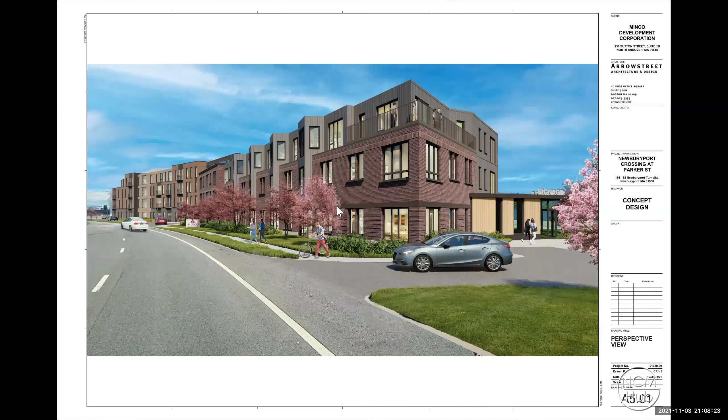And then a view looking southbound on Route 1, showing a band at the ground floor to help define that potential retail zone, some setbacks at the 3rd floor to even further diminish the bulk of the building, with a balcony there, a small retail component, and then these bay windows.

The 3-story building kind of ends here, and then the 4-story building picks up here with the link you can see peeking up over the edge. The landscaping and the buffer elements here, building sign.

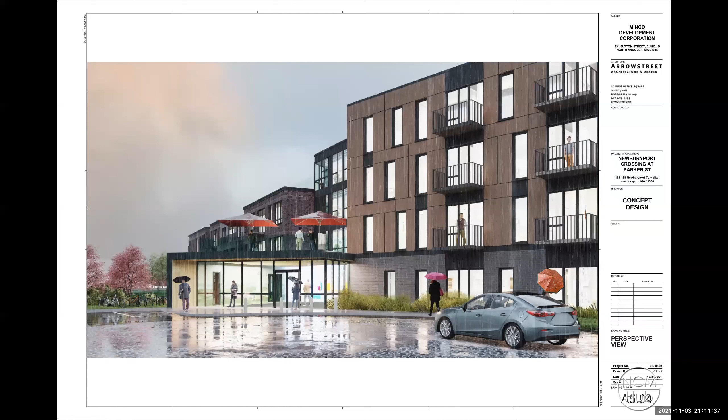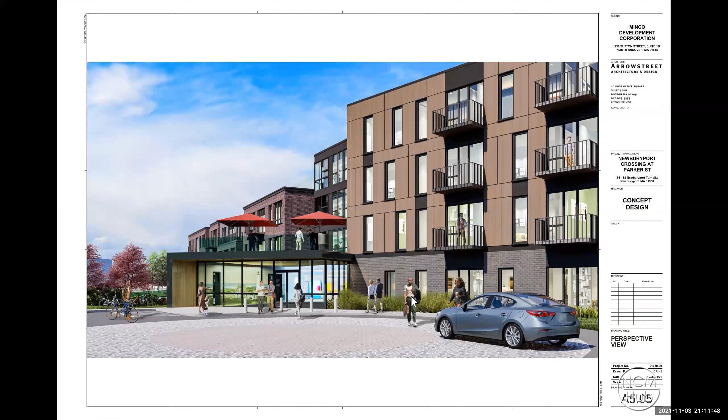A view of the entrance. Since it was raining so much last week, we thought we'd include a rainy shot, and also what it looks like when it dries out.

And lastly, just a close-up of that earlier image showing the entrance, the turnaround, and the way we're trying to connect back to the rail trail and break up the building into 2 pieces with that link, the entrance, pool, and the turnaround area.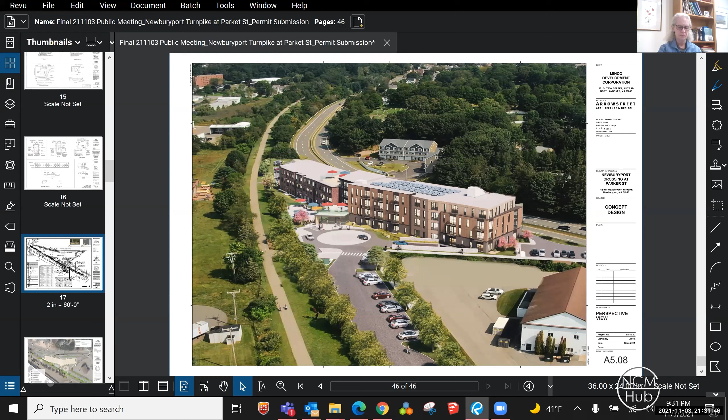I'm going to move on to the next one. This waiver is for a minimum width of sidewalk of 5 feet. A waiver is requested to allow a minimum of 4 at the southeast building corner. I heard sidewalks of 5 and 6 feet. Where's this minimum of 4 feet and why? Could you speak to that, Joe, please? Yeah, I believe there's a pinch point right over here where the sidewalk is a little bit tight, so we had to reduce it down to 4 feet, just in this one small area.

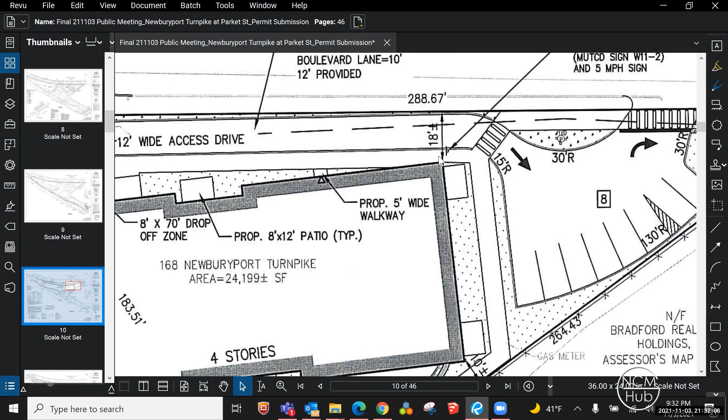Okay, that seems relatively minor in the bigger scheme of things right now, and that could change if the design changes. So we'll move on to the next waiver. Oh, Rick, sorry, I'm seeing you.

Yep, go ahead. So on this thing, we're looking at things in little silos here, and I understand that, but this is a function of the design and the building footprint. One thing, a theme that goes through a lot of this is talking about pedestrian connections, when one of the things we strongly asked for, and told them we were going to be asking for, was a bicycle and pedestrian connection from the rail trail to Hill Street. This particular plan takes that bicycle and pedestrian connection, turns it into a pedestrian connection, makes pedestrians cross 3 driveways instead of the plan we looked at earlier. One of the images in this presentation actually shows a direct shot along the property line to Hill Street. So there are inconsistent pictures in this presentation. But I think this relates directly to building footprint, and also to not addressing what we asked for when we met previously about paying attention to pedestrians and bicyclists, which this plan doesn't do.

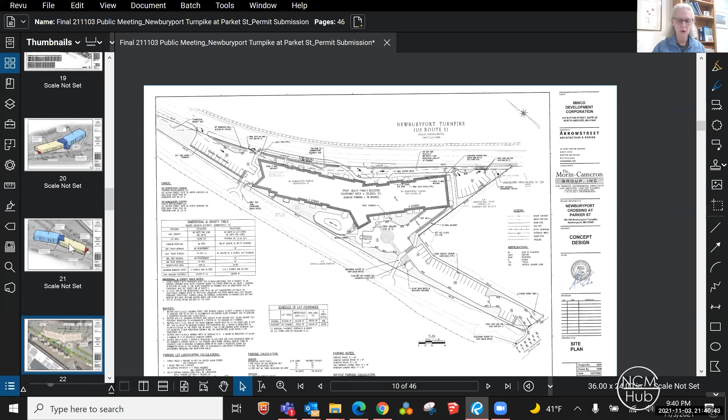The next section is on proposed parking lot landscaping. Any comments on the landscaping plan, just as well as the parking, related to parking?

Phil Christensen noted that item E is not correct, that there are at least 2 places where there are more than 10 spaces without a landscaped island. Well, they did talk about responding to him, so they'll be checking that out, but it's good to point it out. Thank you.

I just had one question about the turnaround, and I wasn't sure about the main turnaround near the entry, why there are no plantings. Was that because of the fire trucks in the middle there?

Bob, are you still here? I can probably speak to that as well. This is the turnaround area, why there's no plantings around that. Yeah, that's correct.

So we need to make sure that the truck isn't feeling claustrophobic as it's turning. There's an overhang, so we typically try to keep any vertical obstructions away from that area, bollards, plantings. So there can be some low-lying cover, but nothing really up over, 12 to 18 inches would be desirable in that area.

Yeah, it just looks like it needs to be softened a little bit, that's all. Would that be, MJ, like in the center of it? Yeah. It's just a big open asphalt.

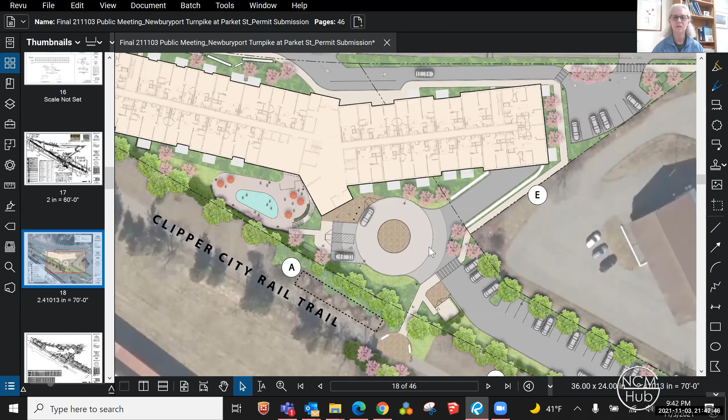Whoops, sorry, my internet connection is really bad. I'm moving around the house. I just meant hard surface, sorry. The idea is to soften that a little bit. Okay, it's a minor point.

We're trying to capture everything now so we don't have to come back to it at a later time and wish we'd done it earlier or gotten it out there earlier. So this is good. Should we move on to requirements for affordable housing?

So those are met. The numbers here are obviously in relationship to the total number of units now, so if they were reduced, then the number of affordable housing units based on 25% would probably decrease. But that we'll deal with when the time comes, if it comes.

There is a request for a submission waiver that we should vote on tonight for an affirmative housing marketing plan. Andy, I'd like to ask your advice on this. Those are usually submitted before final occupancy or first occupancy in a large project of this nature. What would be the appropriate deadline for that?

Sorry, say that again for the. For a submission of affirmative housing marketing plan, where they're asking for a waiver. We're going to vote on this tonight, and I just want to know it should be submitted by what deadline?

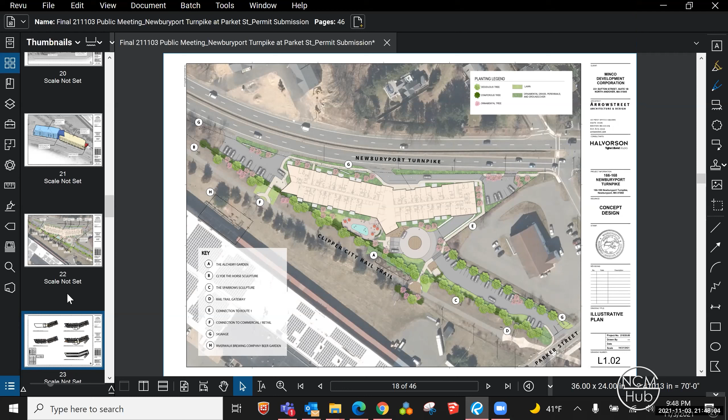Yeah, let's stay at this level. When we get through this, I'll ask the applicant team what more they want from us tonight, in terms of the response they feel they need to make to what we've said, and we'll go from there. So let's keep it relatively high level at this point. Right now I'd like architectural input from others, not just our architect and designer on the planning board, but anybody can speak up at any time.

You want to kick it off, Bob? Sure. Relative to everything shown in terms of the palette of materials and the effort to break down scale, those are all, for me, the right direction to be thinking in. In terms of the character of the building and the quality of materials, I don't have any negative comments. I think that's the right direction. It's a good architectural firm working on this project, with a long track record of very good work in Boston and elsewhere, and I have utmost confidence they can execute this at the level of quality we all expect. So what's been shown so far is a step in that direction.

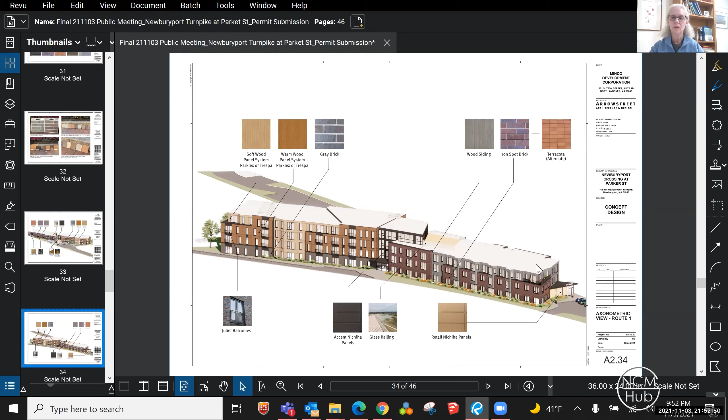Let's see, any other planning board members want to speak to the broad issues around architecture? I guess I just have one comment, and it's not aesthetic, it's more of a function. I'm concerned for the units on the higher south side of the building on Route 1 and the amount of glazing on those living rooms. That just seems really exposed. I love the idea of the sliders, but they're going to need blinds or something in front of them most of the time because of the exposure. The soundproofing can be handled with the glass, door and window selection, but the visual part bothers me a little, though I'm not sure it can be fixed.

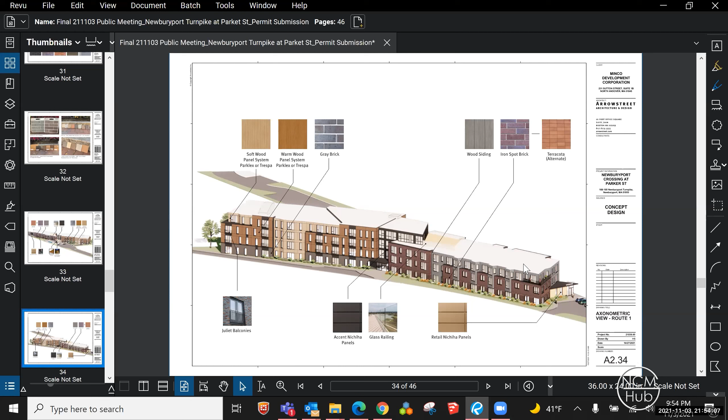Okay. I'm a little concerned that there may be a conflict between the equipment that hasn't been identified yet and how it's going to be screened on the roof, along with the solar panels. I'd like some more consideration about that, though maybe it's too early in the project to ask the team for that. But it looks to me like it can't all go up there.

Any other comments from the board members before I ask the team to respond? Yep, Bonnie, this is Don, and I'm sorry, I'm not sure how to raise my hand when I'm on the phone. So go for it.

We understand that the applicant must conform to the stretch code. My question to the applicant is, have you done a study to determine the incremental cost and/or life cycle savings for taking this building, either making it net zero or decreasing the energy use per square foot by 50%?

Hopefully the question is understood by someone on the applicant side. Again, that's my only new comment. A lot of the other comments I agree with, but I'm not going to be repetitive.

Thank you, Don. Great, okay, good time to turn it over to the design team to respond specifically to Don and some of the other comments, if you have an answer. We have not done an energy study yet at this point, but we plan to do one as we solidify the design and know exactly what we're designing to. So that will be forthcoming.

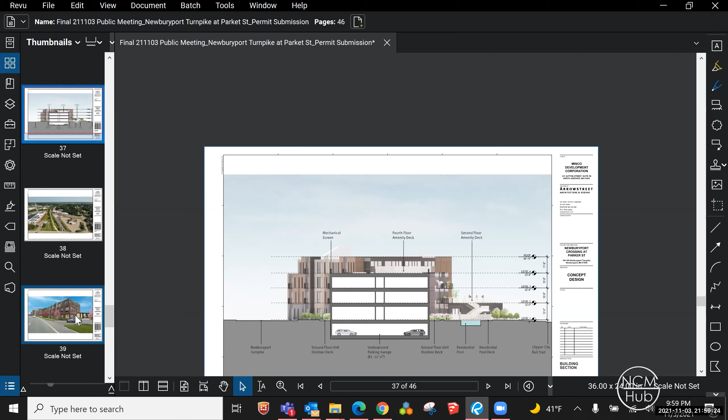And if it needs to be less than 94, that's what I'm hearing from the board. I do want to say that I'm very committed to energy efficiency. I think you'll see in One Boston Way, we are LEED certified and Fitwel certified. In 3 Boston Way, we're LEED Gold certified, passive house. We're shooting for passive house as well as Fitwel. So in terms of fulfilling sustainability issues, we're committed to doing that.

I can tell you, however, that pricing within the last couple of years, even since we started One Boston Way, has accelerated significantly. There's significant supply chain issues, material issues, labor shortages, and pricing on nearly every aspect of this project continues to go up very quickly, much more than we could have ever fathomed when we did our initial financial models.

Fortunately for us, the interest rates have come down to offset a little bit of those cost increases. But if you're following the news, it looks like interest rates will be climbing maybe in the second quarter of next year. It's really hard to say.

But when you layer on additional costs for energy conservation, as much as we're committed to doing it, passive house and LEED certification, using the highest quality materials that we can use—and I think that was evident in One Boston Way, we're using the same material for 3 Boston Way—we're committed to all of those factors, but then trying to make it financially feasible at the end of the day, there's a certain number of units that we need to have to make it work, to balance it.

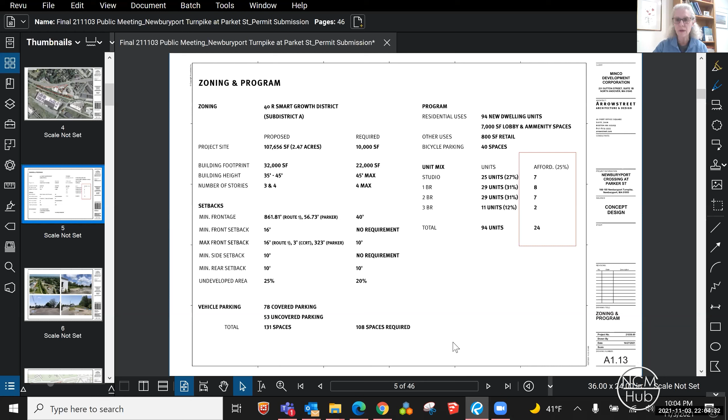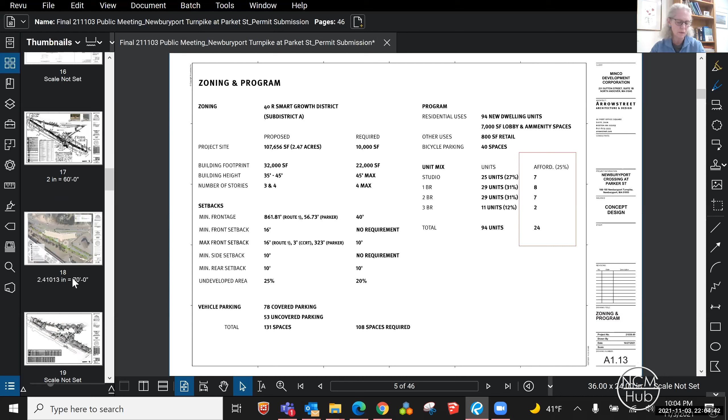Okay, thanks. I'm going to move on to the design standards, just to make sure we haven't left anything out. We may have hit some, no, I'm not sure we have. We're talking about sidewalks and location of building and garage entrances. I know that was touched on. And vehicular access is going to be looked at by the Traffic Safety Advisory Committee, and so we can leave that and get feedback from that meeting afterward.

But any comments you want to make, board members, at this point on this very long list at 10:05 of site design standards that you feel the applicant should consider, looking at this again at a rather high level? I know they would appreciate it. So whatever you'd like to say at this moment about these that we haven't covered, please chime in. Do I see any hands or hear any voices?

I guess just quickly, at a high level in terms of the site, there's really two fundamentally different sides to this building. One faces Route 1 and is fundamentally an automobile and vehicular environment. I really don't know that there will be a lot of pedestrian activity on that side of the building. I think the site plan and the landscape plan should maybe acknowledge that.

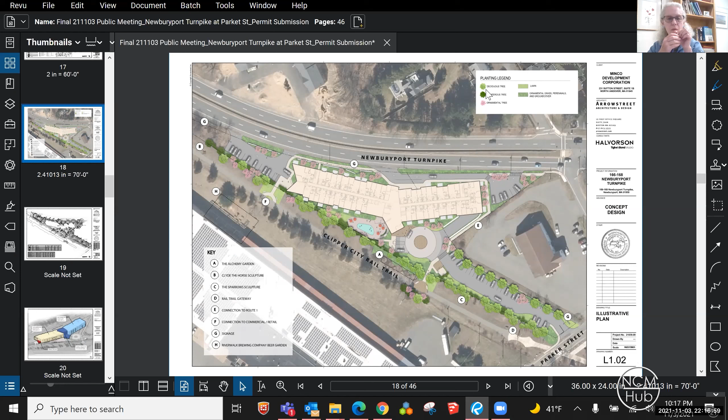So back to my other question, do you want to stick with the December 15th date? I don't know how much work this involves for the design team. And if you can do it sooner, that's fine with us, but we're trying to give you as much time as you need. Yeah, I don't think we'd be able to do it sooner. There's a fair amount of work here, and we'd want to look at options, and we'd have to run some financial models, make sure that it can work. But I think Scott's request is still going to be the same: if in fact we can come to an agreement, or close to an agreement, on a site plan on December 15th, then Scott would start doing the work he's got to do, because any work he was to do now would not be valid if the plan significantly changes. Yeah, that makes sense. Absolutely.

Okay, so I'll take a motion to continue this hearing to December 15th. Bonnie, it's Don, so move. Thank you, Don. And do I get a second? Or who do I get it from? Second, from Bob. Thank you, Bob. Okay, right, calling roll. Alden, yes. Beth, yes. Bob, yes. Heather, yes. Rick, yes. MJ, yes. Don, yes. And Bonnie, yes. So we'll see you all back on December 15th.